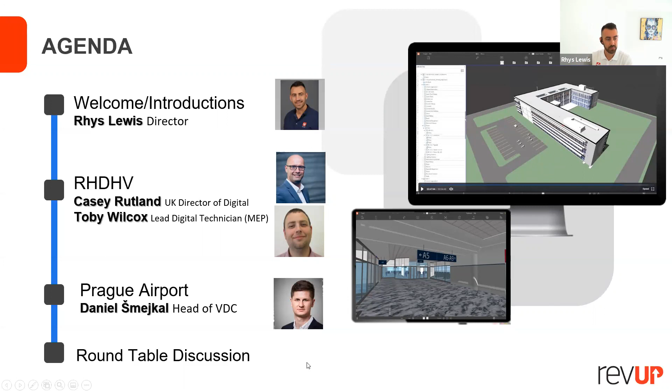We offer an integrated collaboration platform, which is quite a diverse tool that offers construction teams the ability to communicate, collaborate, and coordinate project-based tasks in real time. I'll let the team dive into how they're using Revizto for their specific needs. So why use an integrated collaboration platform like Revizto? With that in mind, I'll hand the mic to our guest speakers today.

First up we have Casey. If I stop sharing my screen. Is Toby with us now? It looks like he's here. Yeah, Toby is with us. Hi Toby, just my camera on, sorry about that. That's all right mate, I know everyone's busy, so welcome Toby. I'll stop sharing my screen here now, and it'd be good if you guys could give me quick introductions, and I'll hand the screen to yourself, Casey, to start with.

Thank you, Rhys. Hopefully you can all see and hear me, both the presentation and my video. So my role here today is to do a quick introduction to both Royal Haskoning DHV and the case study that Toby will be running through in a little bit more detail, but really about our use from a strategic or management point of view of Revizto.

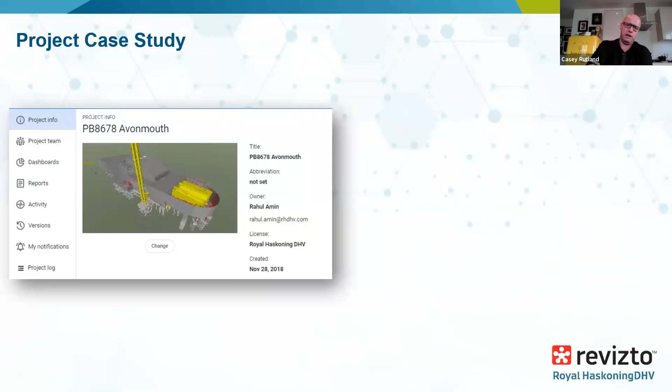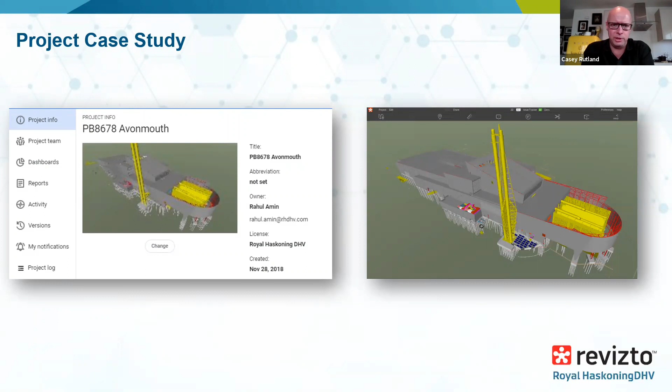So the project case study that we'll be running through is Avonmouth ErF, Energy Recovery Facility. This is a facility near Bristol in the UK that turns waste, refuse, garbage, rubbish into electricity, energy. So it's fairly complicated once you get into the guts of it, whilst being quite a simple building on the outside, trying to coordinate and create design coordination exercises and deliver this in a way that's as slick as possible.

If we look at trying to do this in traditional methods in 2D, you could almost call it negligent. So we need to make sure that we're using the latest tools to make sure we're checking, reviewing and approving, coordinating properly across the project teams, both internally and sometimes externally with clients and other stakeholders.

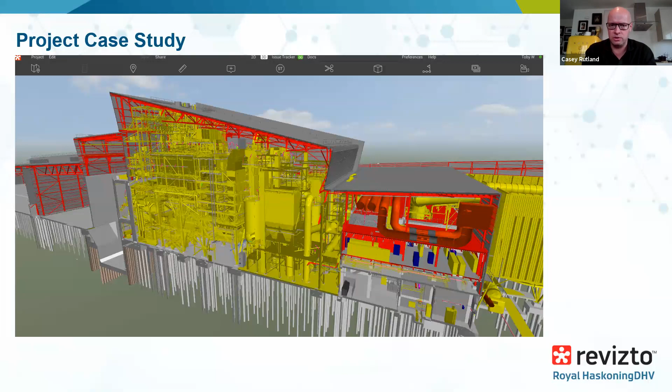So it's really key that this tool both enables us to work remotely, as is quite important these days, but also enables us to transmit and communicate in the right ways the information that we need to consider at the right stages. So with that in mind, we're going to run through very quickly some of the useful things that we get through the use of Revizto, the project dashboards, progress reports, and team management.

But before we dive into that, I do want to address something. As part of our role in the UK BIM Alliance, dealing with numerous different organisations around the country, we do see still a massive focus on clash detection, and actually relatively little on design coordination.

They are two very distinct exercises. Something can be completely clash-free, but actually an awful design. So we do need to make sure that things are coordinated in a way and are right, both in terms of its use, and if it's a building that needs to look beautiful, then it looks beautiful also.

But it needs to work properly and be constructible in all of those different aspects. So I have a totally non-scientific formula for this, which is that clash detection plus design coordination, all managed properly, will give you the results that you're looking for. So better design quality, better data and information quality, which is becoming more and more relevant with all of our clients, reduced waste - both in time, effort, money, cost, and all of those things - and generally better outcomes.

And with the tools that we use these days, and Revizto is part of that stack, the clash detection that we do is the right clash detection at the right time relative to the project. And that's quite an important thing also. Again, people who dive into their first foray into a BIM process will often clash everything against everything, or one model versus another model. And that really doesn't get you the right result. What it does get you is a lot of clashes, and they're not necessarily the right ones that you need to be dealing with at that time.

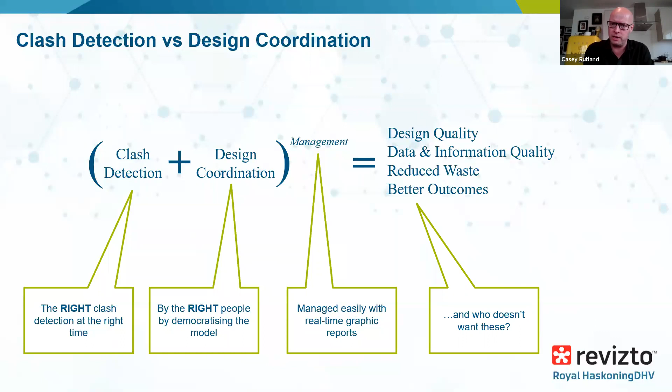And then the last thing is, who doesn't want better design quality, better outcomes? It's what all of our clients are after, it's what all of our internal design teams are after. We don't want to be creating work for ourselves. We want to be creating better solutions and outcomes for our clients, but we want to do it in the most efficient way possible. That's what we're looking to achieve.

Revizto allows us to manage the access, the visibility, and the ability to do certain things within the team. We've been working with Revizto for almost 2 years now. Our enterprise agreement is up for renewal, as Rhys warned me earlier before this session. But it's there, and it's absolutely there. It's being used, I would say, more actively in the UK, but certainly around the world in our global offices, particularly these days, to enable this process to happen smoothly and succinctly.

Being able to see the situation that we're in right now at any particular time with these design coordination issues - seeing what's active, seeing how far we've come and what we've dealt with so far. It's not always a negative thing just to see what's left to do and what work is to be done, but actually seeing where you've come from is a really good thing to be visible as well, if only for the sanity of the team.

What we've also seen is other uses. I don't know whether I'm inviting other people to find other uses for Revizto, but certainly within the organisation, we're using quite lightweight information on the system that then enables our staff to go to site to do site inspections, to do condition reports using standard forms, create reports, add data into various things, create data collection to add to our virtual representations. It's not live data, but it's the right data at the right time, which fits with the Gemini principles and definitions of what a digital twin should be. So we're getting, in some instances, automatic data collection, but through this process using Revizto, static data collection at various key points, and that is absolutely vital.

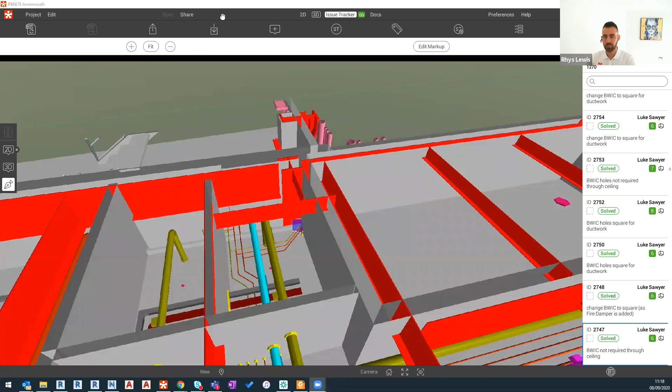So this is our project, which we were employed by a contractor to produce their final coordination installation model. We took another consultant's model and worked it from an earlier stage through to the final production of their drawings while they were on site.

We did all the MEP drawings, did the calculations where we needed to, and then did the coordination, which obviously a great chunk of that was clash detection, but there were other items we solved, which I'll try and display a bit today.

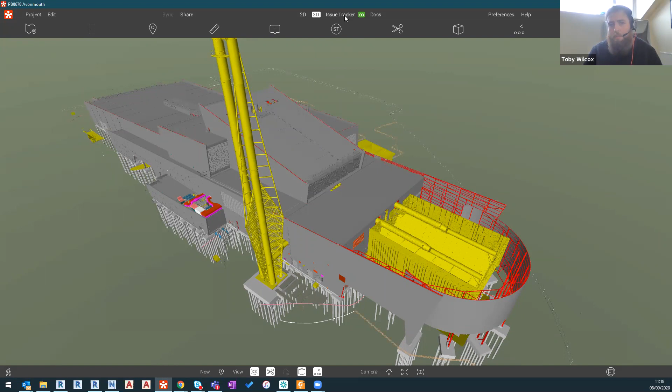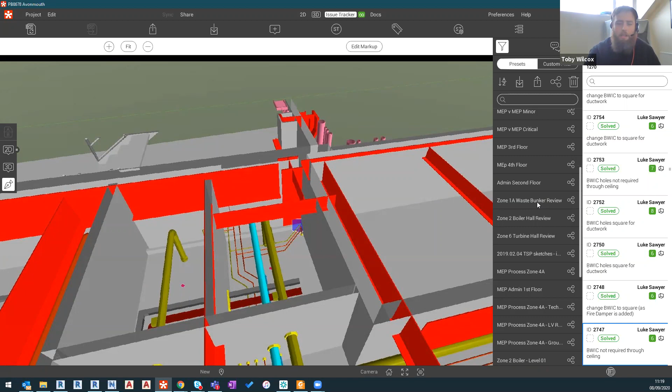One of the main parts that we used of the software was the issue tracker, which we found to be a really handy tool for sorting through problems, assigning them to different people. We found this was a much more intuitive and useful tool than, say, the Navisworks one. We'd produce our clash detection within Navisworks, but it was very difficult to actually understand what real world implication we have. We'd run a clash detection and we'd have 1,000 clashes, but it was difficult to interrogate and work with that and create a plan, which is what Revizto has really helped us to do.

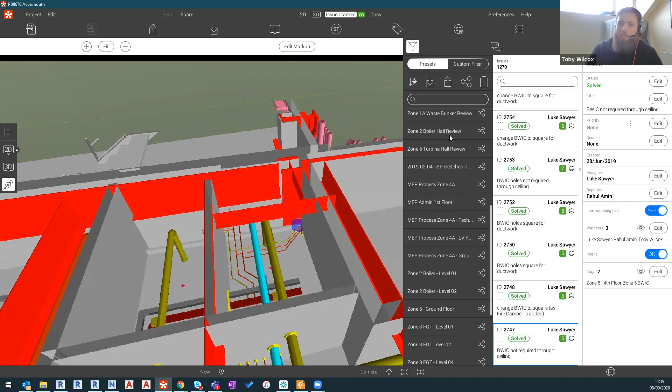So we can organise our clashes and problems properly by whatever area, then whatever zone, and then we can assign people to those clashes or those issues. We can track where we are with them, and rather than just having to rerun the model again, we can actually see within it how people are getting on. We can tell them when they need to be done, and then they can say when they've completed it. So from a project management perspective, that was amazingly helpful and saved us a lot of time and then money on the projects.

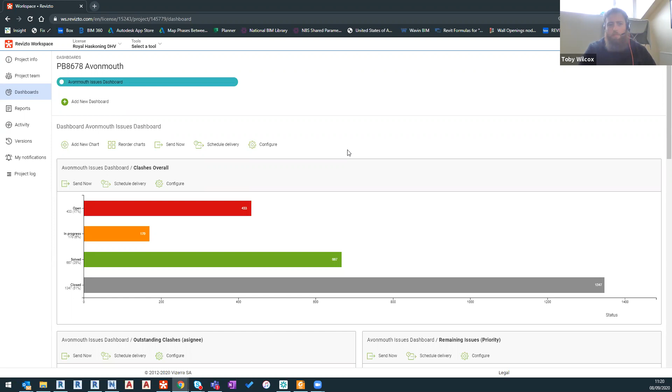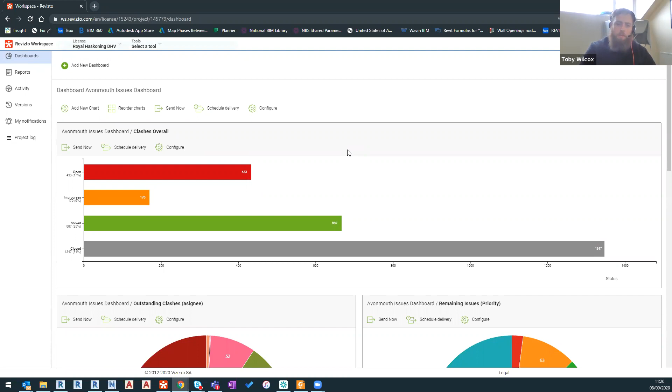One of the great bits about that was the reporting and dashboard side of things. From Revizto directly, we can pull out these little handy pie charts and bar charts just to give us an idea of where we're at, what we've got, and who is doing what, which I think was quite an important part for me.

So we can see who on the project is loaded correctly, overloaded, and then work around that to get people where we need them to be on the job. So we can hit our deadlines and we can get things constructed in time, because we were working on very tight timescales for this project.

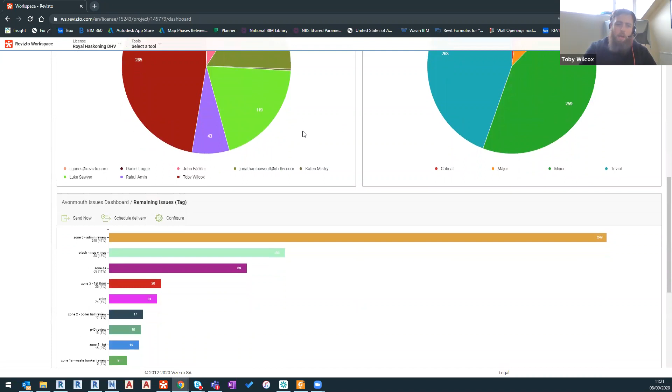And then we can see where each of the issues is occurring. Then we can try and work out what we need to do in that area, which was, again, a great use to us, but also to our client and then the wider construction team.

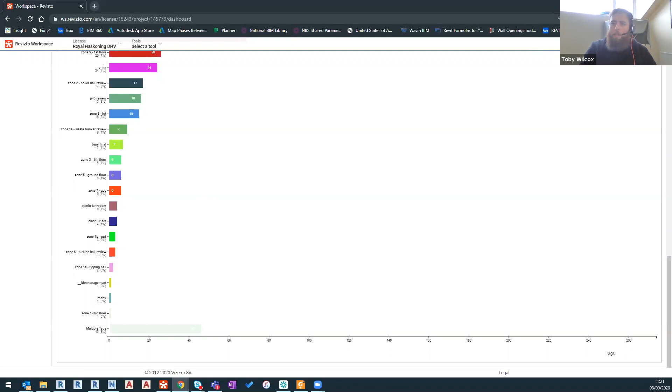And just so we're not focusing on the clash detection, we actually use this software from a CDM perspective quite massively, and that was really helpful for us. So the job itself is a large energy plant, and we have certain areas where you might have 40 meters of nothingness below you or before you can work on an area.

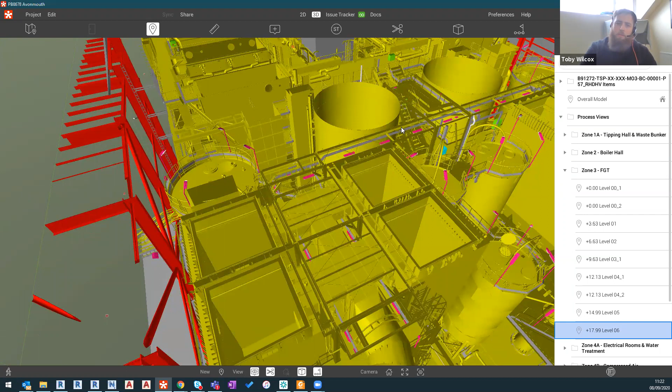We were using the software to conduct external reviews with the builder, the contractor we were working for, and then the original consultant to actually work out what the other solutions were to problems that we were finding as we went around. It gave people a very good, easy to see, easy to understand view on the model. Rather than having to physically go on site, it was a lot easier, a lot quicker, a lot better for us. That in itself just saved money and saved potential for damage to property and people, which is a key issue.

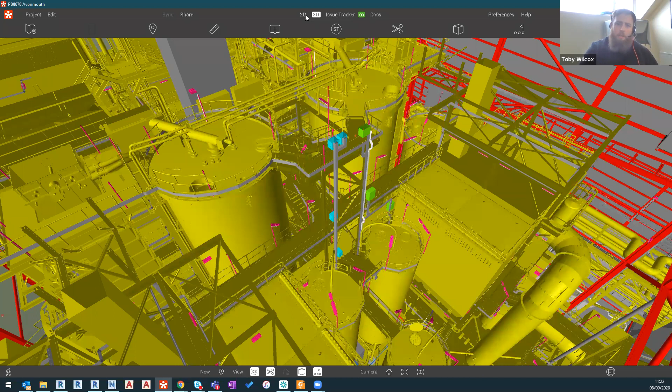There's also the very useful 2D overlay feature, which I'll show off now, because I think what we've appreciated is that while we, as Casey puts it, tech-savvy modelers, we can look at a model and we can understand where we are within the building, what we're showing to people. For people that are either less familiar with the project or just generally less used to looking at things in a 3D environment, it was very difficult for them to understand either what we're trying to show them or why.

We're highlighting an issue. Because they may look at a drawing and say, oh, we've got a light there or a piece of cable tray, and that's fine. But actually, when we can try and show them a model, they still don't get a full appreciation of what they're looking at. This tool was very good at bridging the gap, because we can show them on a 2D plan and also within the 3D in the same space what the item is and why it's going to cause them a problem.

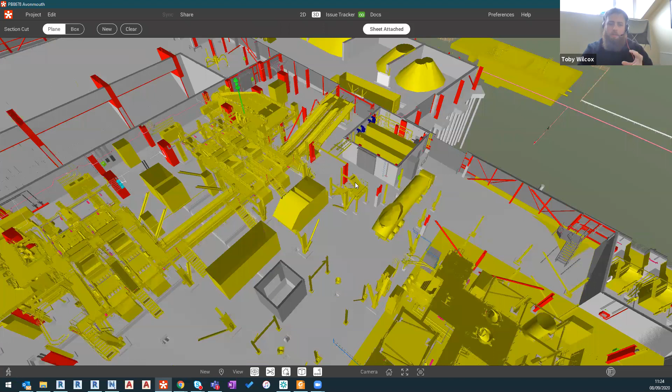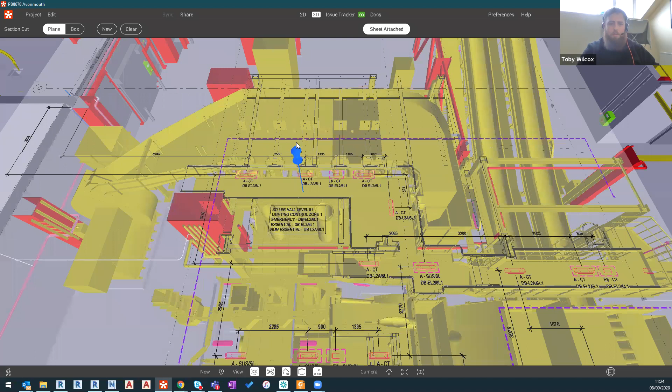So this was handy across the extent of the project, just to really hone into the issues and the aspects for those people. And it clarified for us a lot of early misunderstanding as well. So while we were in the early stages of the project, when people were less used to it, we could very quickly zoom to an area and get resolution on problems. So we would cut our model review and validation side of things in time in half, which was a massive benefit to us on such a large scale project.

So what this tool does is it just overlays the 2D drawing on a 3D environment, which at its core is such a wonderful little thing, because I think there is often a detachment between producing a 3D model and the final output of a 2D model. This bridges the gap between the two and makes things easily viewable and identifiable, which is really good.

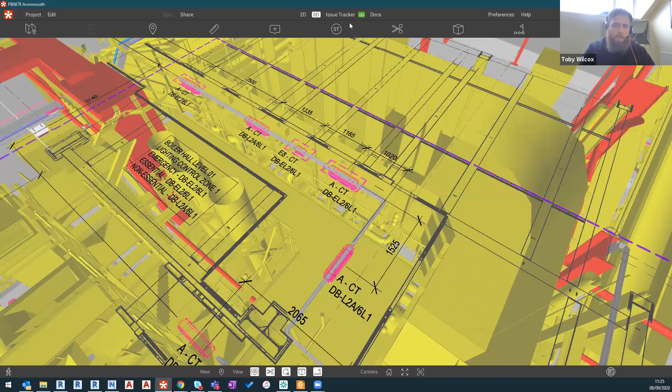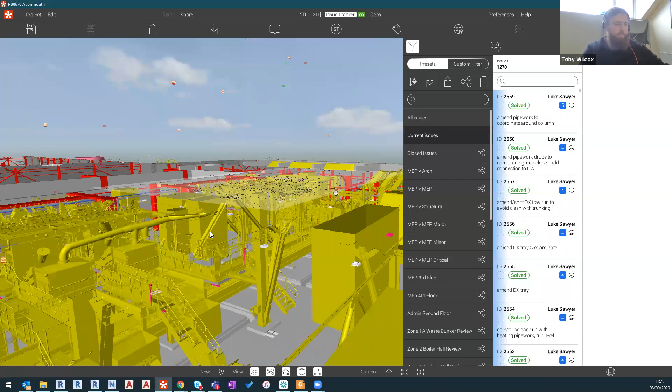The other aspect that we found nice was the viewpoint, which actually shows you where items are. If you're looking at a project overall, it can be very difficult to understand where your issues are. So you can run your clash detection, or identify issues, whether it's a clash or more of a soft issue. But using the tools and the issue's visibility, we can see where problems are, what types of problems they are, and the status of them.

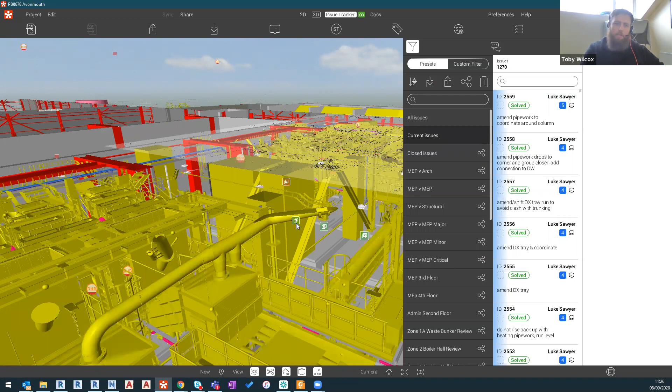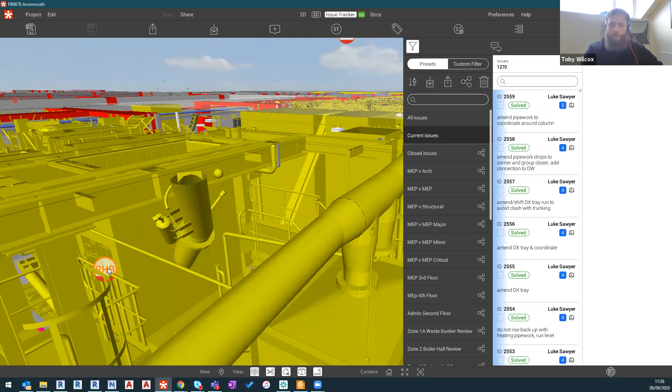So from this zoom in here, we've got a few solved clashes. There's an outstanding clash there, but we also have these other tags, which are sort of manual tags that we've added in, which highlight a specific instance, specific problem or incident. And that allowed us to fly through the model and more quickly see where we're getting the issues, which we've found good.

And this is an example of another part that the tags bring up, as this isn't a clash that we have. These are removable handrails, which we need to make a note of, so we can understand that that is going to be a problem, but we don't have a physical item clashing with it. So if we were to mount a light fitting around that area, it provides a problem but doesn't provide a clash. So it allows us to get that deeper understanding of how the building will be used, to allow us to design it better before they've started installing handrails or installing the lights and then realize there's a problem, which would lead to more cost to rectify than if we can just review it now and get it sorted before they even get onto site with that.

Which really does, it's those little things where we might only save £500 per issue. By the time we've added them all up, we've saved thousands to millions, was our experience of it.

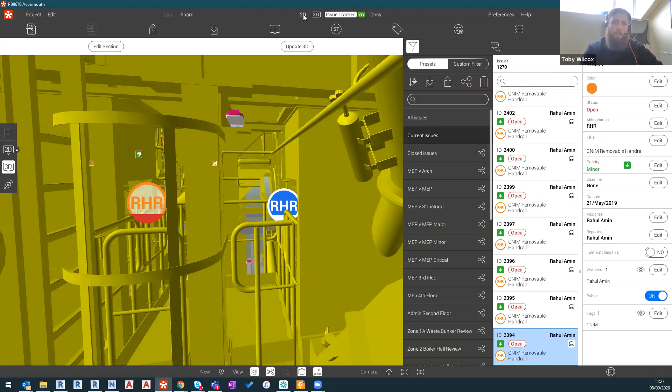And going back to the 2D, you could also see those issues on the 2D plan if you are less comfortable still with navigating a 3D model. If you're a bit more old-fashioned, or you're just not as experienced with the software, this gives a good bridge and a good way of understanding that, and displays it in quite a clear, precise view for everyone, I think.

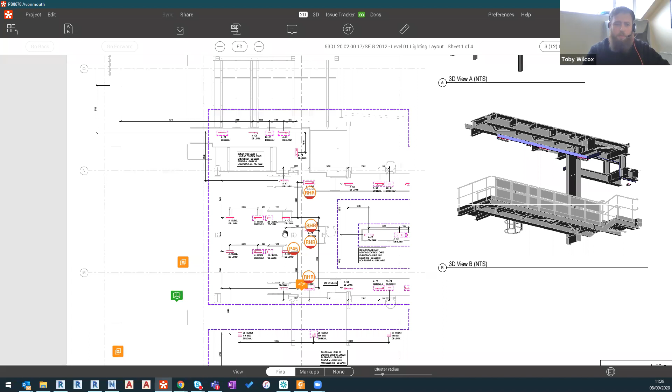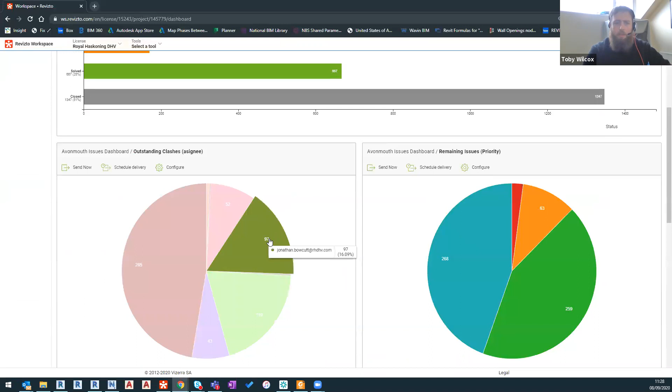And what we also did as part of it was using the reporting and dashboards function. You can actually export reports from Revizto directly, which was really good, and really helped us to convey to our client and the builder as to why we were putting in extra time and extra changes.

So it wasn't stopping us having to do the changes, but it was a good justification for why we were doing it, and why when our bill came in at the end of the month and it said we've got an extra £5,000 worth of work, it justifies that way. So it gives another reporting tool and another bit of analytics that you can more easily show to people the issues and get validation and justification for it. So from an accounting point of view, that was really effective and really useful for us.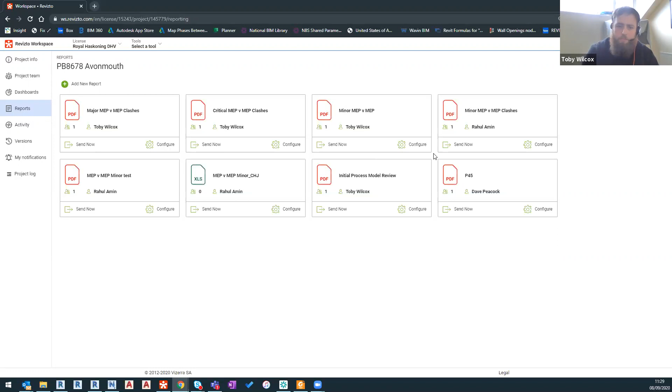I'm just trying to think if there's anything else. They were the kind of main ways that we were using the software.

This will just show a quick version of the report that we get. It actually gives you the same information that you pull out of the model.

It gives you the assignee and the reporter, which gives us more accountability within our project, and also gives a status of what we've closed and what we've got open, which was good.

So we could say by the end of the month, we've closed 500 issues at £30 an issue. So here's a cost figure for us - it's either a cost saving, or it's a billable quantity that we can actually work against, which is always a very useful thing that we need on a job.

I think without that, our costs would have spiraled way out of control if we didn't have a mechanism where we could manage it as easily or as effectively.

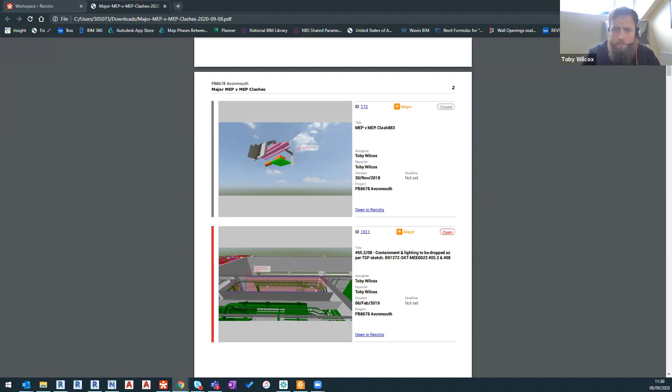Does anyone have any questions? Yeah, I was just about to ask that. So thank you, Toby. There don't seem to be any questions on the chat panel, but if anyone's got any, they can chip in there. I've got one - we'll have a think and we'll answer them afterwards as well.

Yeah, just a question, but something you didn't mention at the beginning, which I think would be worthwhile people understanding the journey, because for those of you who don't know Royal Haskoning, when I first started working with the company many years ago - as a company, Casey, how many people are you? Oh, around 6,000 around the world.

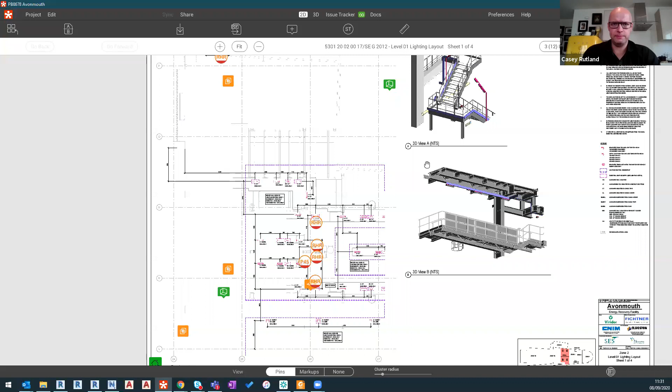So quite a big shift of people to steer and change the way people are working and using technology. An initiative that Casey started - was it 2 years ago? The digital expos, how you were going around the offices. Yeah, 2 years ago. I think a question, I suppose, how did that work, and engaging people to understand what technology was available for them to use to work more efficiently?

Well, yeah, I think they did work quite well. We're still seeing the benefits of doing those, and for the people that have joined the call, we decided that a lot of people within the company were becoming digital blind. So actually what we thought we'd do is take some representatives of various different companies that we're either working with or want to work with, from software solutions, from process solutions, or project case studies.

And we traveled up and down the UK and just hosted some digital expos to basically put in front of the staff, literally in the reception, in the meeting rooms that they had in various different offices, and show them what various different softwares and tools that they had available to them, and what it could do for them on a daily basis. And it did work.

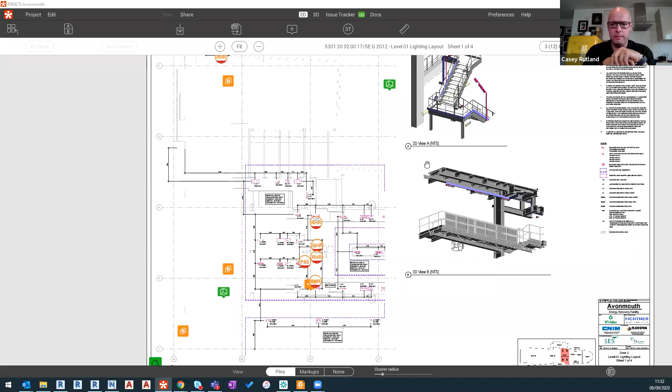It worked quite well. We did get an initial spurt of activity from various different people just adopting different processes and technologies. But then that continued - so at a slightly lower level, but it continued and is continuing.

So we're actually doing, in a couple of weeks, another virtual one of those that's a global event. It's not in person, obviously, because we can't do that now, but it's a virtual version of exactly the same thing. Very, very helpful way to do things, to literally put things in front of people so they can see it with their own eyes.

Thanks, Casey. A couple of questions are starting to come through now. So is the clash detection report generated automatically within the Revizto environment? So one for Toby, I guess.

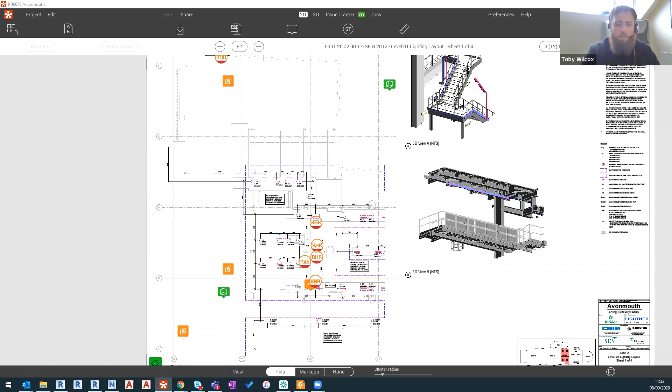So the clash detection is done within Navisworks. So there's still the reporting, I think it was - Toby? Yeah, so the reporting is done from the dashboard, so you can directly get to it from Revizto.

So you just click this button here, it opens up a web page, and you have access to either your existing reports or to add new reports as you want. It's very simple - you can filter by any of the conditions within the model, because there's such a rich amount of data within the model, either from Revit itself or that you put into Revizto. There's a lot there that we can filter around, so it doesn't just have to be something as simple as we want clashes from a certain test or resolved issues.

You can really drill down into items you want, whether it's done on tags or any other sort of parameter within there. It gives a really good reporting level of customization, so you can tailor that report to however you need to show it off, and what information you need it to convey.

So the clash detection is done in Navisworks and the clash management in Revizto, is that correct? Yeah, Toby? Yeah, exactly.

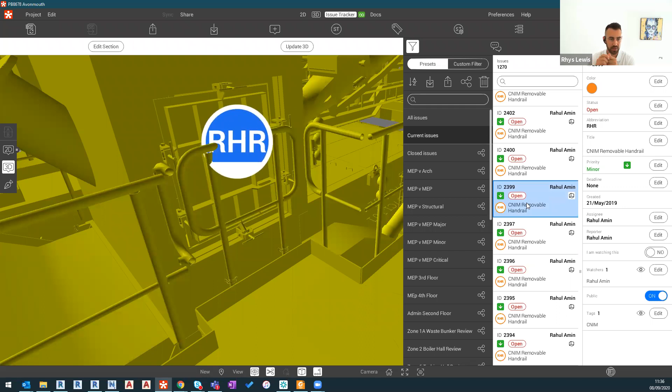That switchback as well works across lots of different tools. So Revit, AutoCAD, Navisworks, MicroStation, 2D as well. So yeah, well pointed. Perfect.

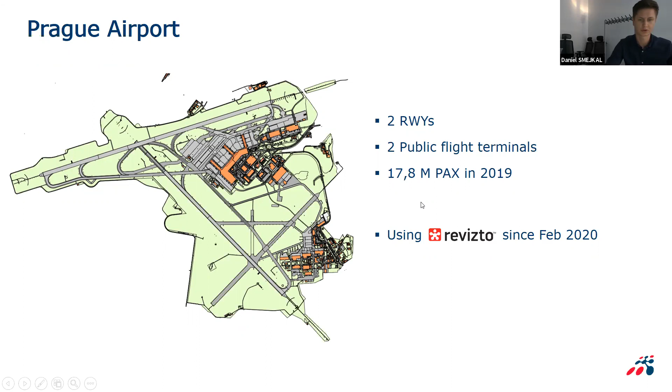Which was the decision to create a digital twin, or asset information model, of our terminal buildings. So we decided to map our Terminal 1, which is a building that was built in 1968. And of course, with a building of this age, the documentation can be a bit outdated.

The existing documentation of this particular building was in our internal GIS system, where we keep our floor plans, layouts of the buildings, room information, and many other things. Many technologies are documented in GIS, but there are also technologies that don't have any GIS documentation, such as ventilation, heating, cooling. So we decided to map this and create a precise model that can generate up-to-date documentation.

Since the construction of this terminal in 1968, of course, there have been many constructions and renovations. So the existing documentation was fractional. For many technologies we didn't have a complete set of documents, and it's fractionally divided into parts coming from projects and constructions.

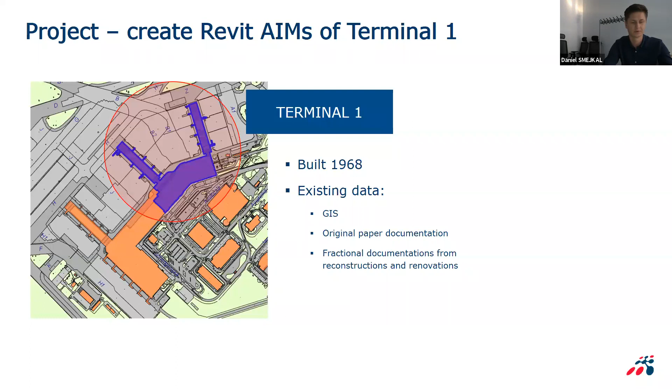So the goal of this project was also to unify all this and create one source of information for the building, and for future possible integrations with our systems like GIS, as mentioned, or future use of a CAFM system for facilities and maintenance.

So we decided to just use Revizto for this project for a very clear reason: it's a platform that can aggregate many types of different data in one place, and then the data can be used easily for working in the office and creating the Revit models.

What was our initial input data? As I said before, it was some drawings, and we created a very simple Revit model just to have a coordinate system and the spatial arrangement of the terminal. We started with one part of the terminal, Pier A. We imported PDF drawings and created the basic space. The basic 3D model only had columns, floors, walls, rooms, and that was basically it. We needed it to assign 3D space or 3D information for the imported drawings, which you will see later in a live demonstration.

Once this was done, we started collecting data straight in the field using the Revizto app on iPads, usually done by a technician maintenance person together with a VDC specialist using Revizto on the iPad app. We were also using 3D laser scanning with the Leica 3D scanner, importing the point clouds into Revizto.

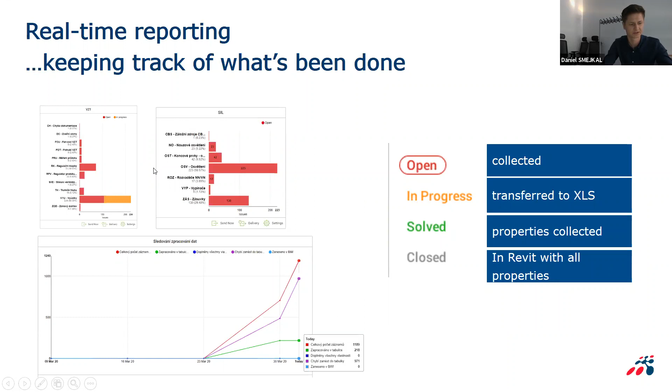So let's switch to a live demonstration on Revizto.

Here I will start with exactly how we started. At the beginning, we created stamp templates. If you're familiar with Revizto, you probably know what stamps mean. If not, I will explain later in the Q&A session.

So what we created was a stamp category for each technology. I'm sorry it's in Czech, but I will translate what is necessary — there's no need to understand everything in the text. For example, this stamp category means ventilation, and for this category we created a stamp template for each type of device that the technology contains. So for ventilation, it can be air handling units, air terminals, and so on.

Also, we created templates for errors in the existing documentation. So when we took the documentation and drawings to the field and discovered something was wrong, something that doesn't look the way it was built, we used a stamp to mark it and a markup to draw the real existing condition straight in the iPad.

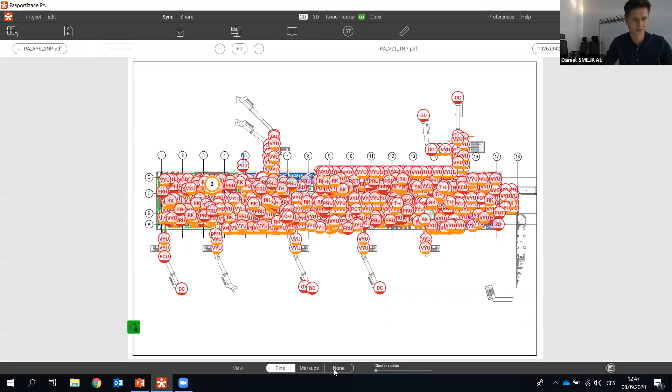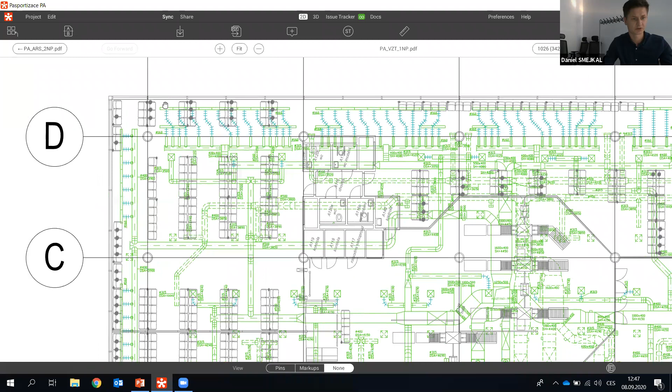So the next input was 2D drawings, looking like this. When we first got into the field and started collecting data, we could see our drawings. This is a drawing of an HVAC or ventilation system for the terminal, and we started putting stamps into these 2D drawings. Of course, the 2D drawings needed to be assigned to the 3D model, so that whenever we create a stamp, it gets the right coordinates in the 3D space.

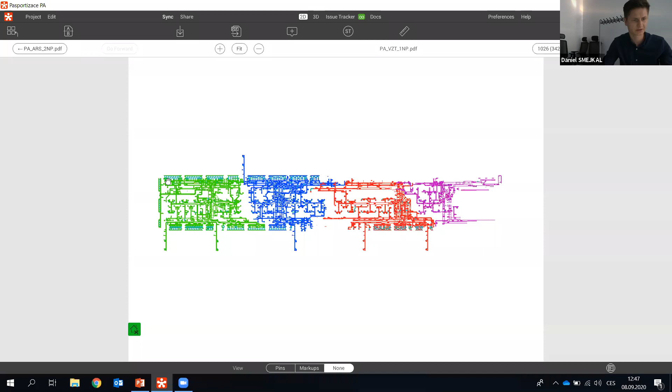And as for the records themselves, I can show the issues or the stamps using filters. So now I have a filter in my issue tracker which turns on only the ventilation issues. So here we can see

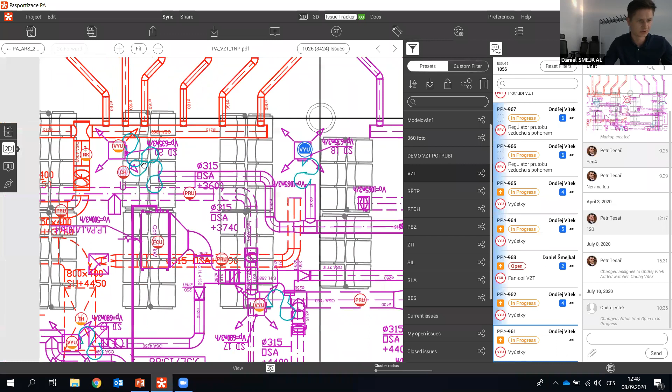all the records that were made for the ventilation. And in the chat panel of the issue tracker, we were putting extra information. If there was any information that could be put here, we tried to do so, which was, for example, airflow. We also usually measure airflows of all the terminals.

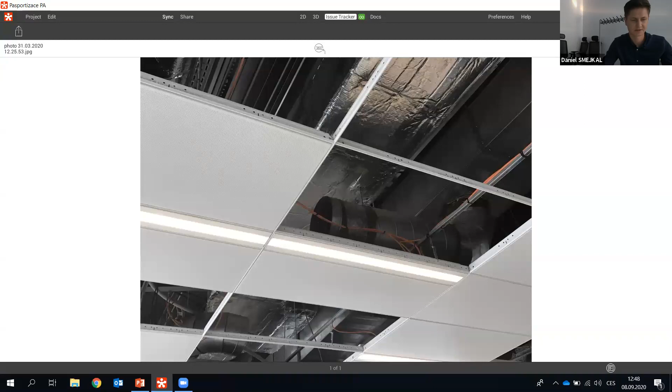We're putting photos taken straight from the iPad. I saw you had some 360 examples as well there, Daniel. Yes, I don't know if you're... Okay, I'll switch the filter to the 360 photos. Nice use of the filter there. Yeah.

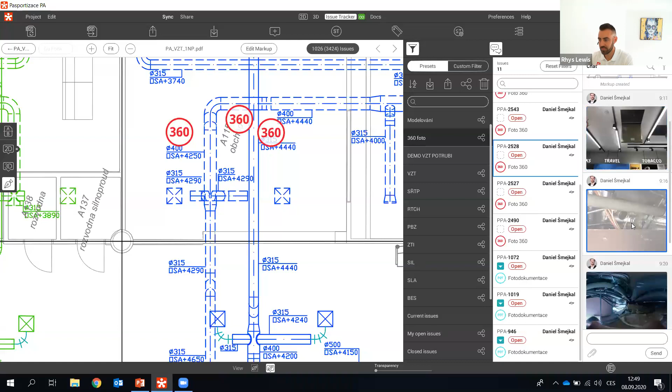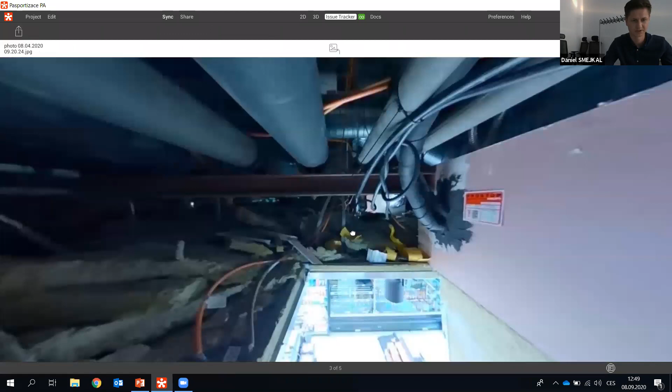So whenever something was impossible to capture by the 3D laser scanner, we were using the 360-degree camera. Oh, this is not the right example. Yeah, which kind of completes the picture of how the space looks.

What camera were you using as well? I'm guessing people will be curious. Is it the one I suggested? I saw it on the slide. Yes, yes. Maybe you can suggest it later. I forget the name of it, or the model name. But it was low cost, right? I mean, to get one of those and start to collect that data. Yeah, it's a pretty cheap solution and very powerful.

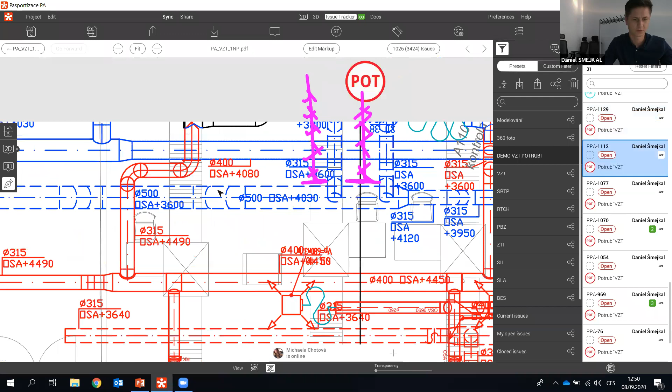Cool. Okay, so also we use markups whenever the documentation wasn't correct. So here I have a few stamps showing where the drawing was incorrect. So there is a duct missing. So we use the markups to visualize this and to help us model it later.

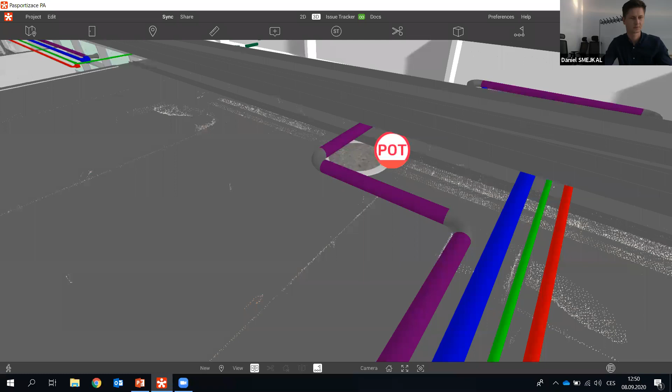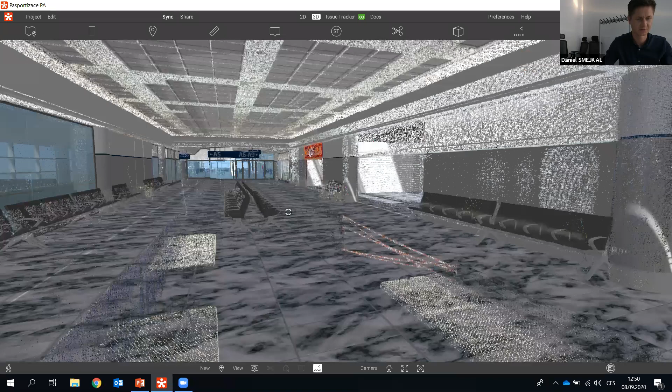Let's jump into the 3D space, where we can also see all the issues. The ability to filter the issues was very helpful because since there are a lot of devices to be discovered, the model gets kind of filled up with issues, and if we reset all the filters,

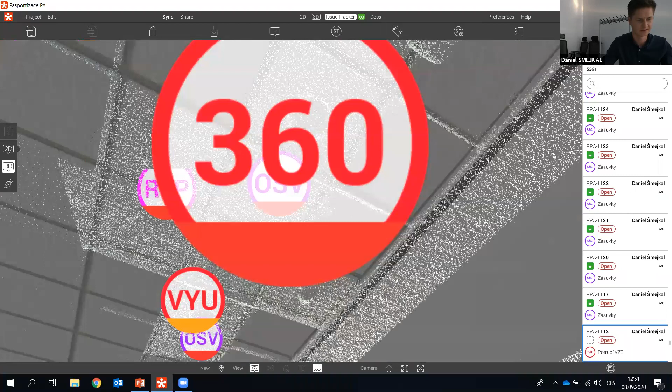we'll see basically the model. Oh yeah, now we can see. So this is how dense the issues are, and yeah. So here we have issues for all the different technologies visible. We have lighting fixtures.

And yeah, all the other things. So the ability to filter this is very nice. So when we want to see only 360-degree photos, just turn on the preset filter, and there we go.

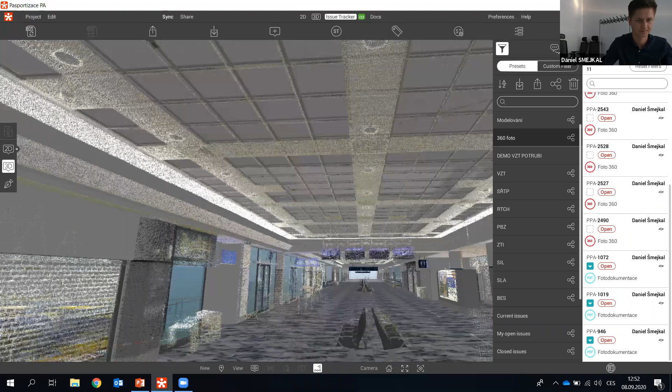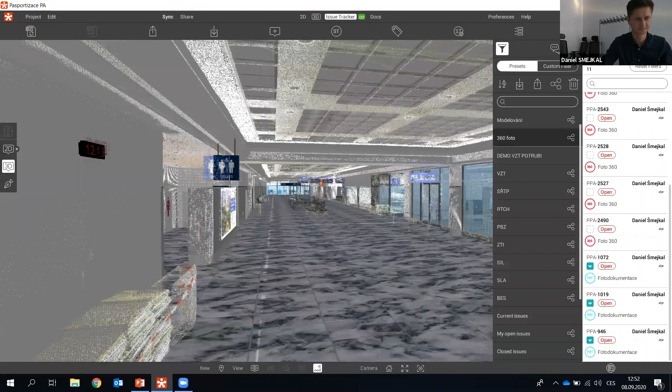So then after the field mapping, we were able to import the point clouds, compare them with the models, and create a more detailed model of the terminal. Let's have a little walkthrough.

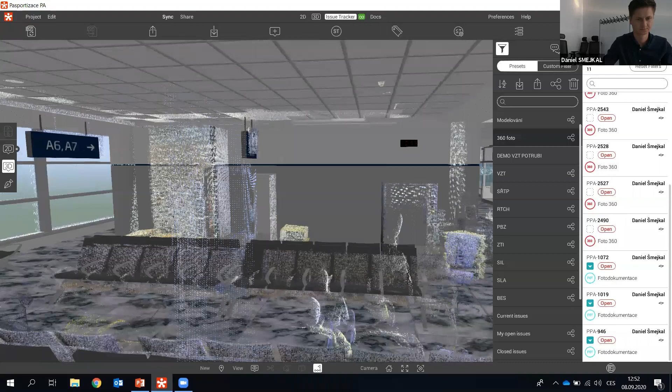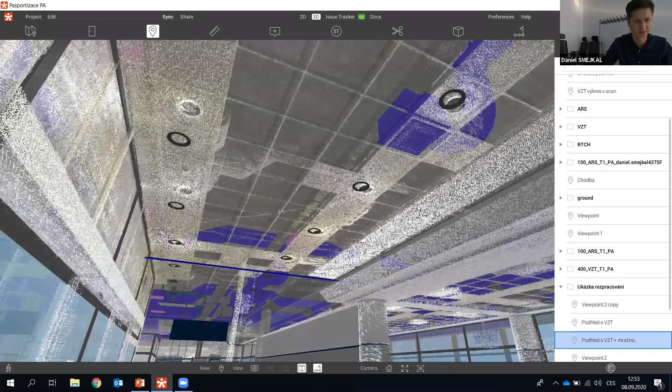Okay, here I have an example of a comparison, 3D model with the point cloud. It's quite impressive how Revizto can handle large data of point clouds and show them in a very fast way and easy to navigate also, which is not usually the case, so when you use point clouds in Revit, for example.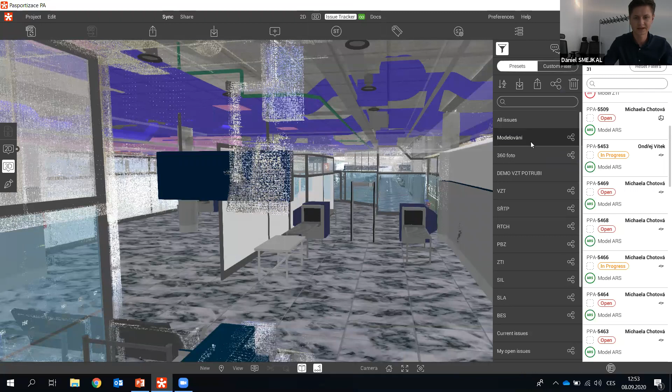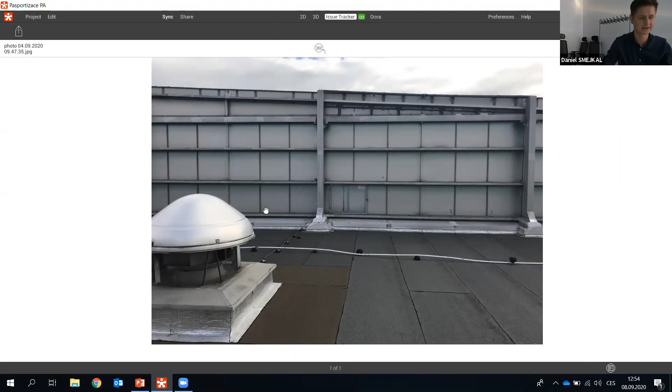So except for these stamps for tracking our devices, we were using Revizto as a communication tool for modeling tasks or tracking our modeling tasks. So we also create stamps for some modeling issues, which the person working on the 3D model can just use for keeping track of their own tasks and, for example, going to the field again and mapping what wasn't mapped well in the initial mapping.

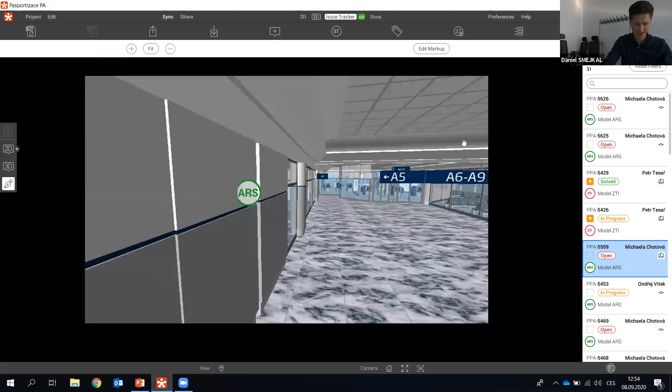I guess that's it from the demonstration. So if anyone has any question, I'll be happy to answer.

That was great, Daniel. Really, really interesting. So it's interesting, actually, we've got a couple of customers on the call who are asking questions and answering them at the same time. So they actually confirmed for us it's a Ricoh Theta V360, which is the one that I use as well. So that's perfect.

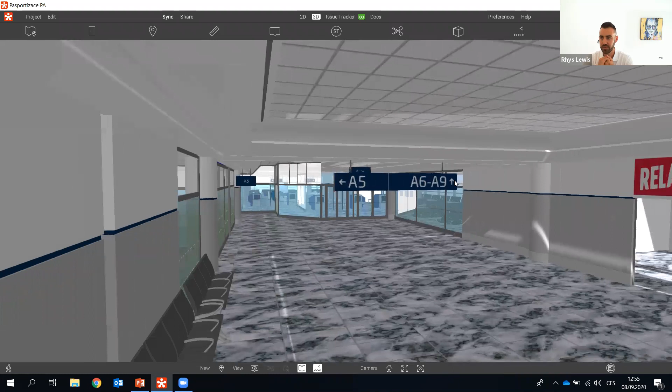Any questions for Daniel coming through there, Sasha? Or any from yourself or your? And we have some of your friends from a number of airports in Germany. Any questions from them?

We have one question for you, Daniel. Are you able to automatically compare accuracy between design model and point cloud to help with construction progress? No, I'm afraid no. It's been just visual comparison.

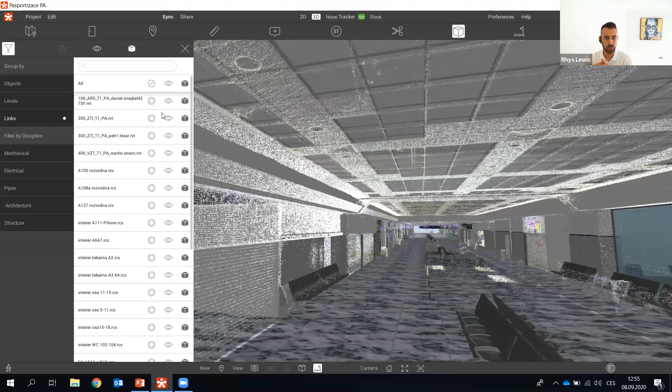Yeah, that's one for us, I suppose. There are other tools out there that will allow you to do that, where you can sort of clash between point clouds and models. There's a number of interesting startup companies doing that. We're working with one of them called Scaled Robotics. Go and check them out, and they'll be able to feed that data through into Revizto via a BCF.

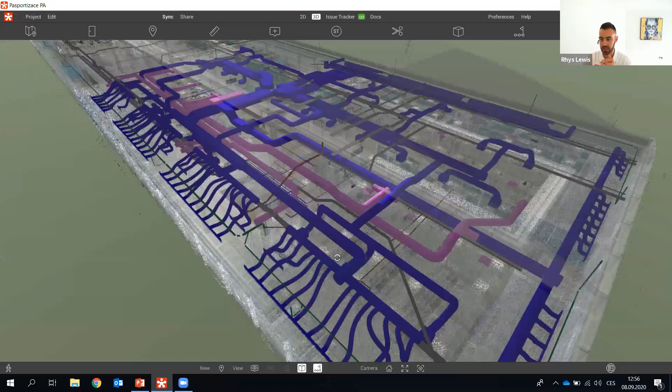Well, I think you've joined the Revizto family a little later on from Casey and Toby, Daniel. It looks like you've had incredible success in the last couple of months alone. So what's next for the airport now? You've done quite a lot. Is it just a case of continuing with that success?

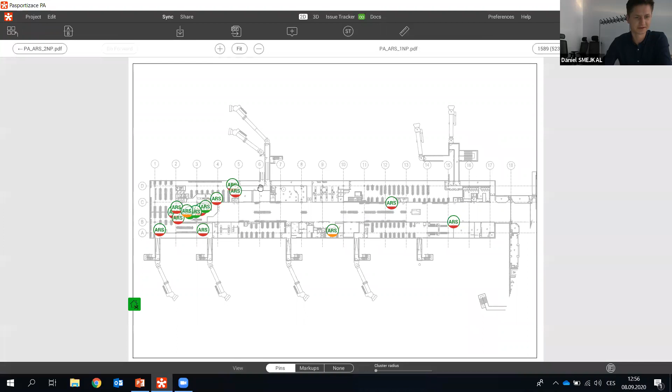Are there any? There is still a lot to do. We just started with one part of the terminal, so now there's all the hard work to be done.

What's been, would you say, the most successful part of implementing Revizto over the last couple of months for yourselves? If you could pick one highlight, I guess.

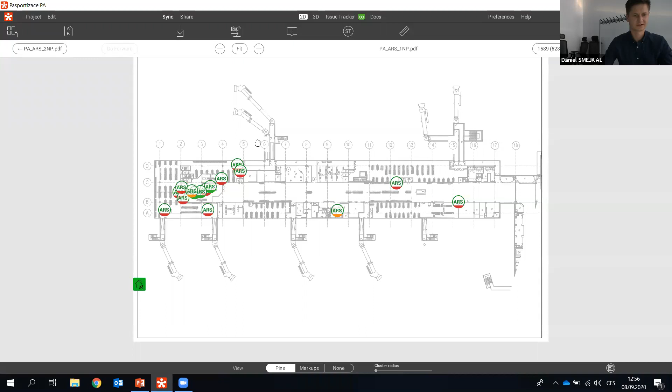Highlight. There are many highlights. What I wanted to mention is that we were happy that our colleagues who had no previous experience with any BIM models were able to pick up Revizto quite quickly, and they're really happy to use it. They got their iPads, they go to the field and are able to collect the data and communicate with the rest of the team or with the VDC specialists. This is a thing I appreciate a lot on Revizto, that people like using.

Perfect. Toby, Casey, any questions from Daniel or common lessons learned? Whilst you do that, I'm going to share.

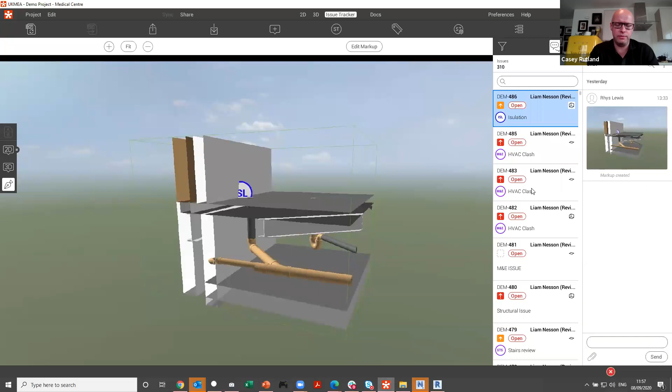I think I'd agree with Daniel. The usability is one of those key things, and I think any of us who have used clash detection tools in the past know how complex that is, but there are parts of the team who don't need to use those tools. They just need to view the results. This tool just enables the navigation and tracking of various different design coordination issues in a much more slick manner than other solutions we've seen.

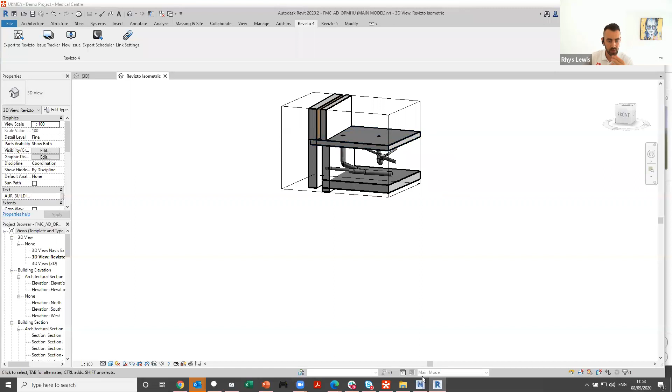Perfect. I just wanted to mention one of the points you raised, Toby, that switchback facility, which is actually a really important part. Whenever we're creating tasks, stamps, bringing in clashes, Revizto is based on the coordinate system. So what that allows the user to do, or the person assigned this task, is literally synchronize their authoring tool to Revizto by pointing it to the right project that Toby or Daniel has invited them to. They double click on that blue box here in Revizto, and that will take them directly to that area with a section box cut in their Tekla model, MicroStation model, Revit model instantly. So there's no time wasted figuring out where something is, or potentially changing the wrong thing.

And that works as well with 2D information. If this drawing is also loaded in this Revit file, here we go, that will take me directly to that drawing. So the idea is around communicating in a more efficient digital way that we can track what's going on, regardless if that's a design related issue, a coordination, or site inspection. Revizto's a simple and lightweight tool to use, but it's quite versatile.